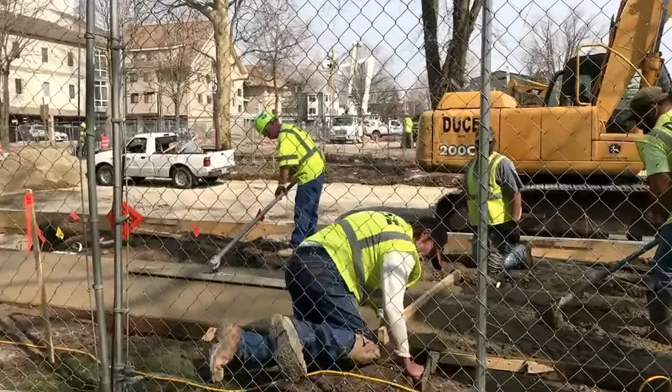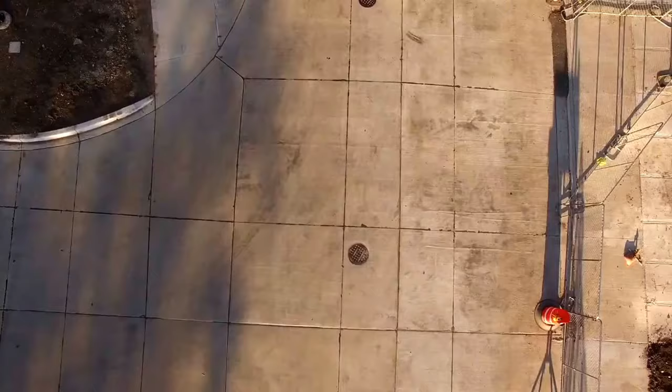Measuring productivity of construction projects has never been an easy task. Yet, at Odebrecht, it is important to track construction labor productivity as it can make the difference between a project being profitable or a project destined to create a loss. As a construction manager, it's our job to keep close tabs on what employees and the workforce are doing on the job site to ensure that work is meeting optimal productivity standards.

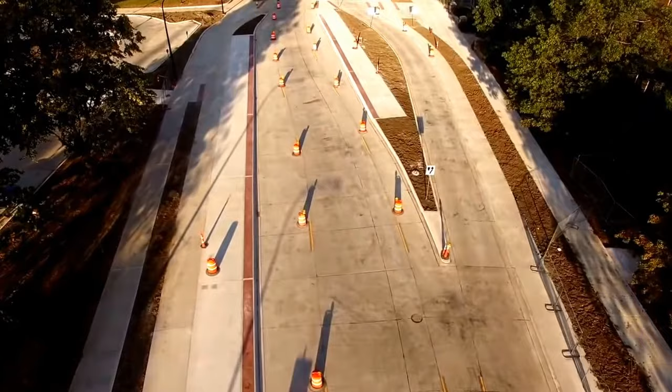This constant assessment takes managers a great deal of time and effort. However, analyzing the data from such observations can help one take stock of the situation and take corrective actions to realize the project charter. To experience this firsthand, we, a team of 7 students emulating the project team of Odebrecht, the large Brazilian construction corporation, decided to study a repetitive construction activity. We chose the installation of a storm sewer as the activity under perusal.

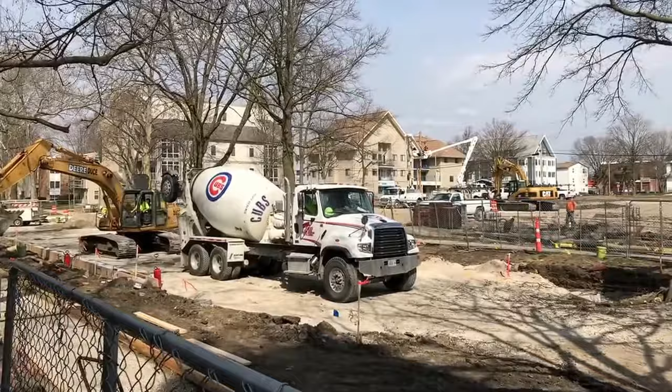The broad strategy was to first understand the existing field conditions and the terms of the contract. Detailed work process analysis of current practices was undertaken via crew balance charts, process charts, and flow diagrams. A productivity improvement program was undertaken to implement 3 alternate work processes, each with a different focus, varying from reducing time to reducing the size of the work crew or proposing a new work methodology.

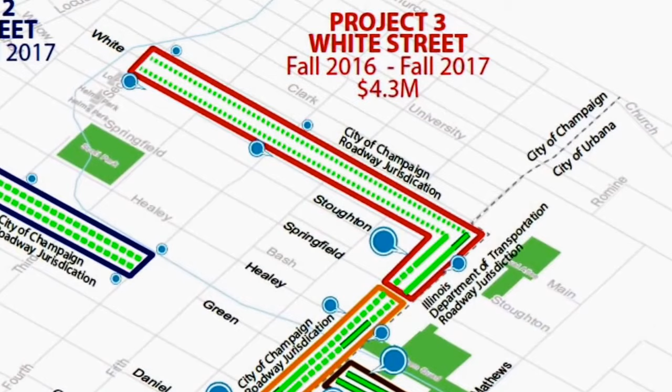The project site chosen for the study was the third phase of MCORE. This involves construction along White Street from 2nd Street to Wright Street and on Wright Street from White through Springfield Avenue. MCORE stands for the Multimodal Corridor Enhancement Project, undertaken to improve mobility in the core of our community through the Tiger Federal Grant Program.

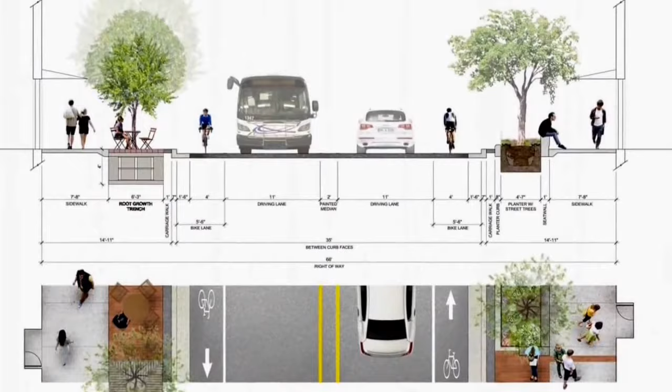The aim of this work is to have a multi-modal complete street corridor to accommodate all modes of travel such as bus, pedestrian, bike, and vehicle. The team is improving not only the superstructure but also the infrastructure. To do that, there are 4 basic steps on this project that they've been following.

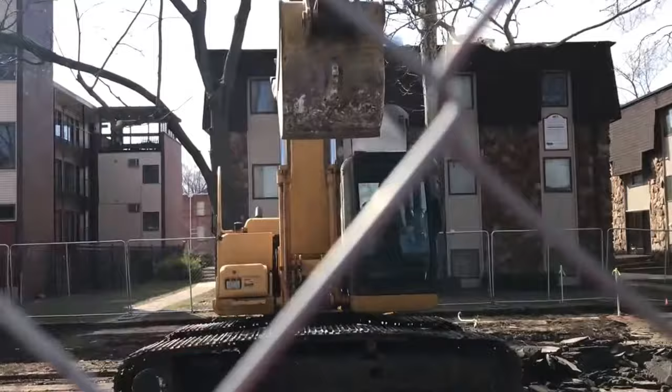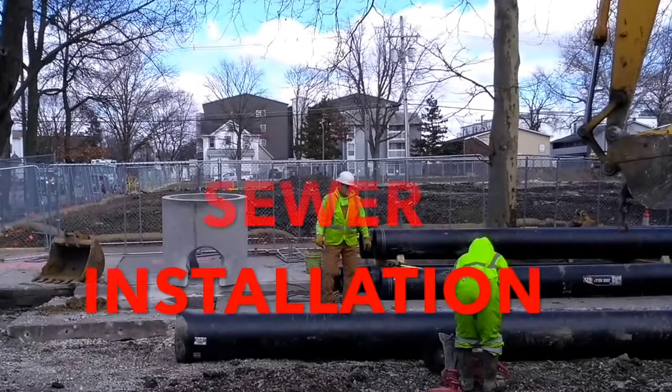Step 2. Storm sewer installation. The process starts with the replacement of the storm sewers and pipes. Then the team is removing the old pipe system to put the new ones. New pipes and storm sewers are being moved and placed with a hydraulic excavator.

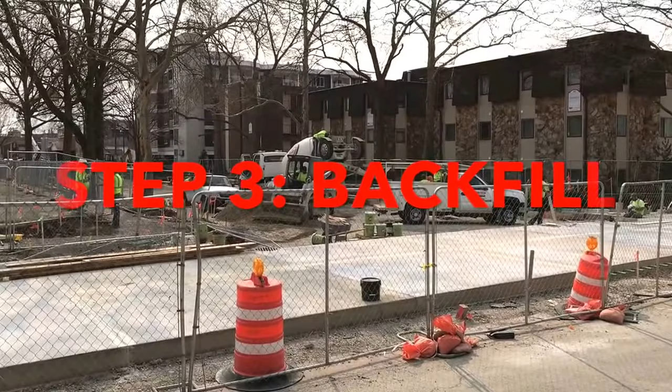Step 3. Backfill. Once they're done with replacing the pipes, backfilling and grading are the last things that they should do before the road construction. As you can see here, the crew is using a truck loader to fill the pavement area.

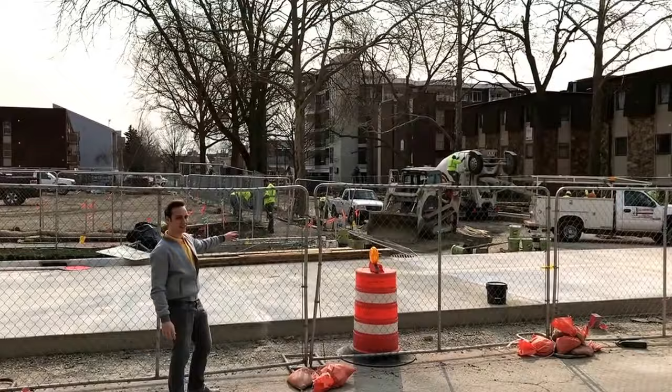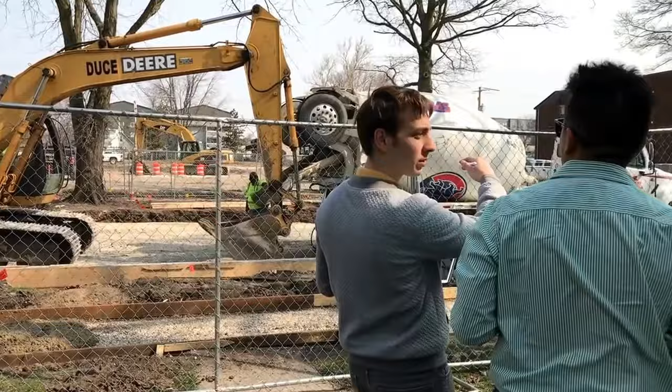Step 4. Pavement construction. This is the last step of a challenging and important work. Pavement, sidewalk, curb, and gutter are just some of the components of the road that affect the lifetime of the project. As you can see here, with a Deere 200C, they are pouring the concrete for the sidewalk. The road construction step is very important to have a good-looking and effective multi-modal complete street corridor.

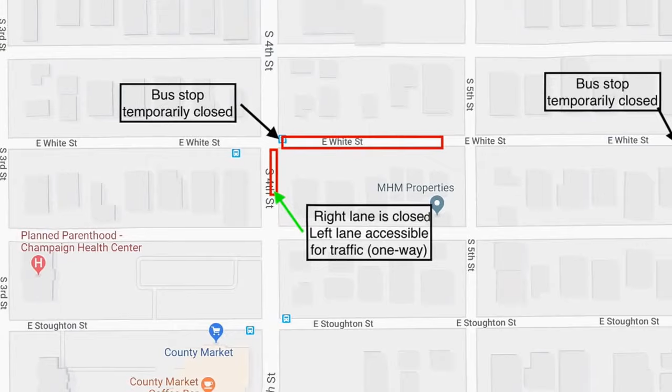Regarding the site conditions, as you can see, East White Street is completely closed on the section between 4th and 5th Street. Excavation is ongoing on this part. Since this section is closed, traffic is extremely affected. Multiple buses for CUMTD were rerouted. These buses now serve temporary stops on East Stoughton Street.

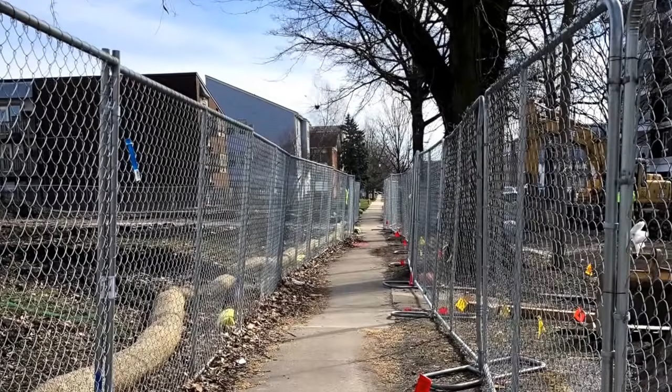The right lane of 4th Street between East White Street and East Stoughton Street is closed. Consequently, the traffic is also rerouted, but the left lane from north to south is open to traffic. However, the pedestrian walkway is still open on the north side of East White Street. Fences are placed to protect and prevent pedestrians from going into the job site.

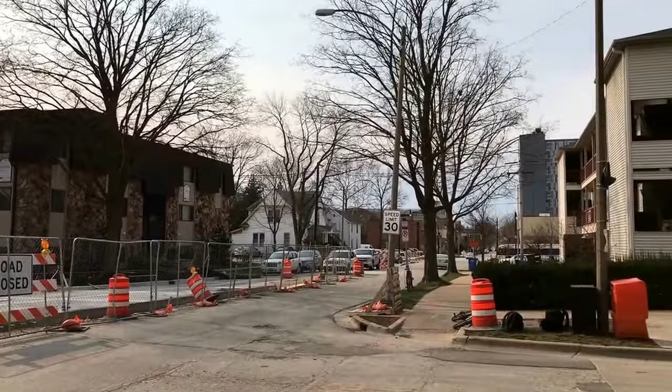As you can see, multiple cones are placed along the fences, so they are visible to drivers and pedestrians during nighttime. 2 big signs indicate that the 2 lanes are closed on East White Street. A smaller sign indicates that the sidewalk is closed too and asks pedestrians to use the walkway on the opposite side.

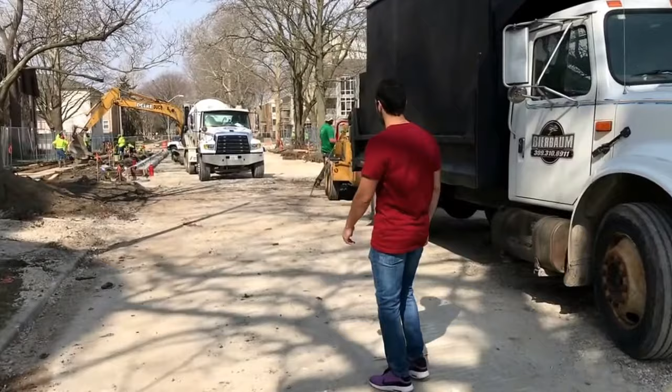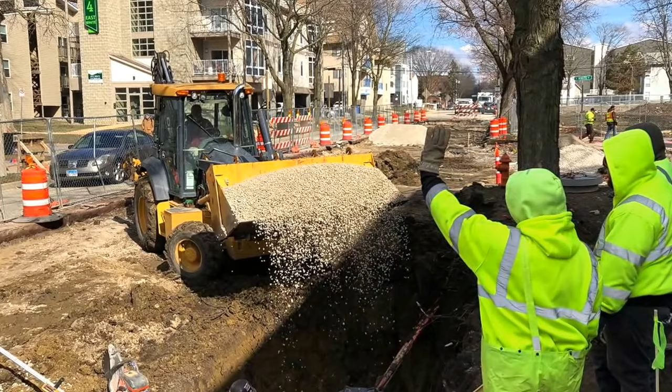Odebrecht's main interest is to ensure the safety of its workers on the job site. For this purpose, the company appoints a safety manager. His main role is to ensure that all safety rules are implemented on the construction site. Some of the tasks taken by the safety manager include the permission to visit the job site, the proper attire of visitors, raising awareness on safety, and keeping a safe distance.

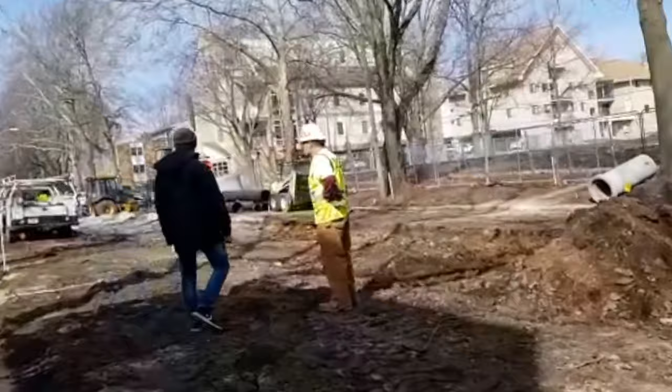Regarding the safety of the team working on the excavation and placing of tubes, the site and workers were found to meet all safety requirements imposed by OSHA. OSHA prescribes construction personal protective equipment for construction workers, including safety glasses, face shields, hard hats, and so on.

Improving job site productivity means possessing a clear understanding of exactly what is going on. That means gathering data. Two main avenues for gathering data are asking and observing. Asking questions can be accomplished through interviews or questionnaires. Observation includes analytic worksite documentation.

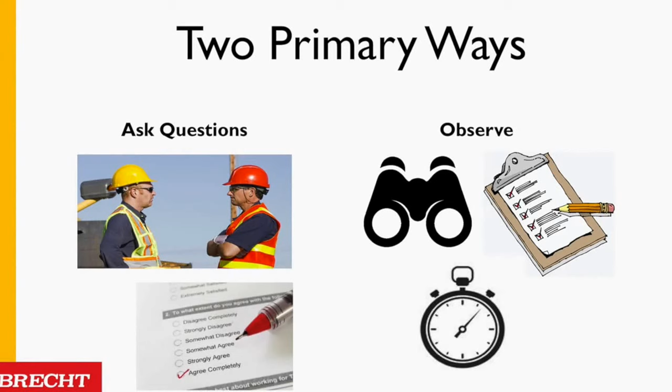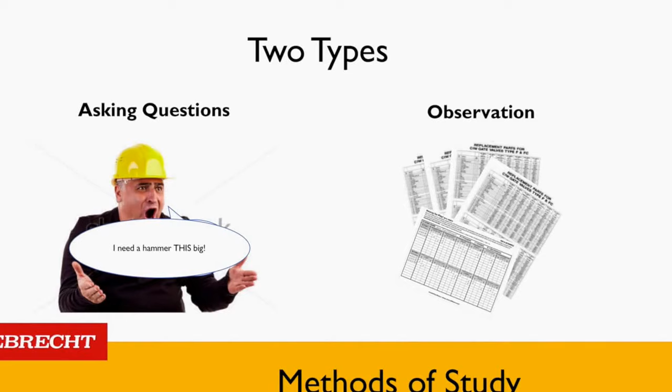Laborers and foremen have the ability to provide some of the very best feedback and can reveal things missed by numerical indices. But while answers to management's queries have very clear significance, the feedback can be tough to measure or model. A complaint about tool availability, for instance, doesn't indicate how pervasive this problem is. A factual accounting of worksite activities, however, would provide exactly that level of analytic power. So how can this be done?

Through activity sampling. Activity sampling may include field ratings, productivity ratings, and the 5-minute rating. While all these provide some indication of how productive a workforce is, they do so with varying degrees of sophistication and statistical power. This means a couple of things. First, it means that there should be enough observations to rule out noise as an influence. Secondly, to be valid, observations must be done randomly.

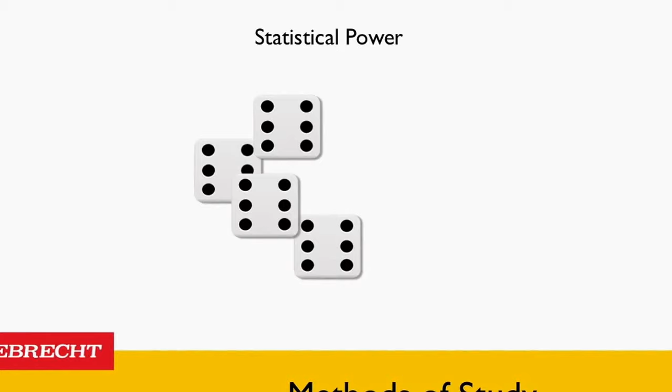If every moment doesn't have an equal likelihood of being observed, then the data gathered may be corrupted by some form of sampling bias. Can a die that rolls 6 four times in a row be trusted? Probably. Well, what if it comes up 6 400 times in a row? Not a chance. Get it? More observations means more statistical power.

And what of random sampling? Why is that important? Imagine a superintendent who shows up only at noon to see if his worksite is busy. Chances are his non-random observations will give him a poor representation of the situation. Random sampling provides data from which statistical inferences may be made. Once data is acquired and analyzed, it must be interpreted and presented if decisions are to be made.

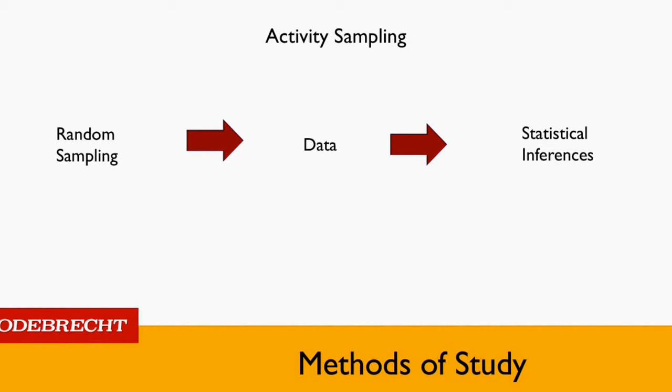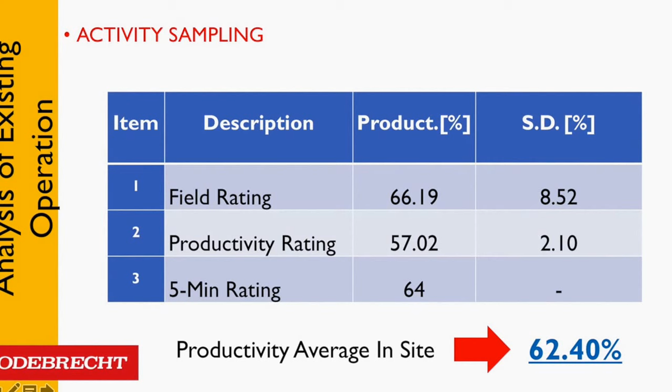A field rating counts the number of people engaged in meaningful work against the total number of workers observed, providing a percentage of productivity. Similarly, a productivity rating provides a percentage of engaged workers, but further discerns between effective work and contributory work. A 5-minute rating provides a non-statistical, quick and dirty look at the situation.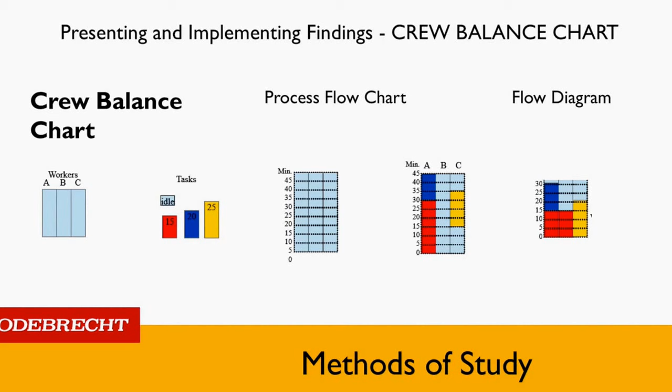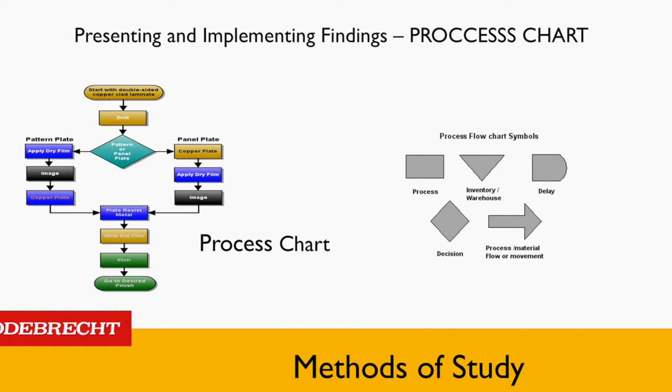Presentation and implementation may be performed with one of the following techniques. A crew balance chart allows task allocation to be represented graphically in chronological progression. It can be used to easily identify inefficiencies. A process chart is a sequential list of steps, coded by symbols dependent on the step's nature, and a flow diagram is essentially a line sketch depicting the movement of people, materials, and equipment. This encapsulates the process of data acquisition, analysis, and presentation.

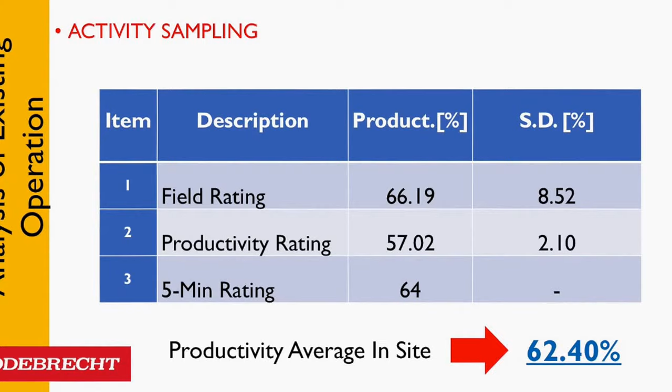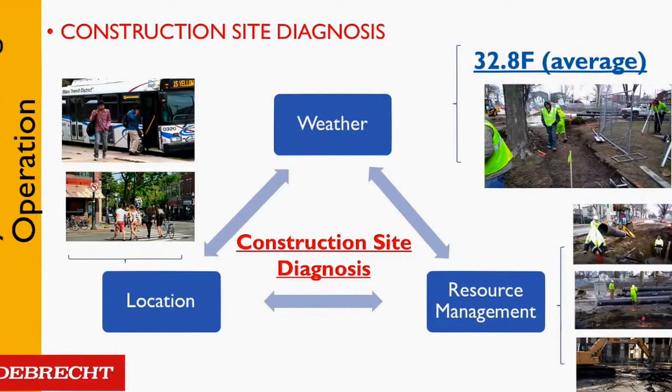Odebrecht conducted the analysis of the existing operation at the construction site. Developing this analysis, Odebrecht performed observation sampling at the construction activity. As a result, we obtained a total of 62.4% of productivity performance on site. We determined a total of 4 factors that affect the behavior of our selected site activity, which is storm sewer installation. These factors are weather, location, personnel, and equipment management.

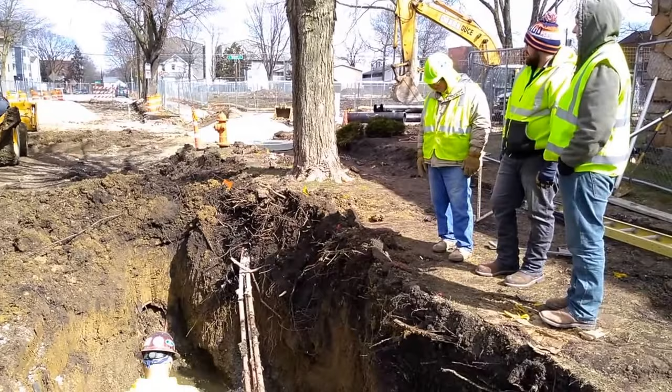In terms of personnel and equipment management, a total of 11 workers and 3 types of equipment were found on the construction site. After observing work routines, there is a clear cycle composed by 6 of these workers that facilitates the analysis of the construction activity. These workers are distributed equally into different labors. For instance, there are 2 operators, one for the backhoe and one for the excavator.

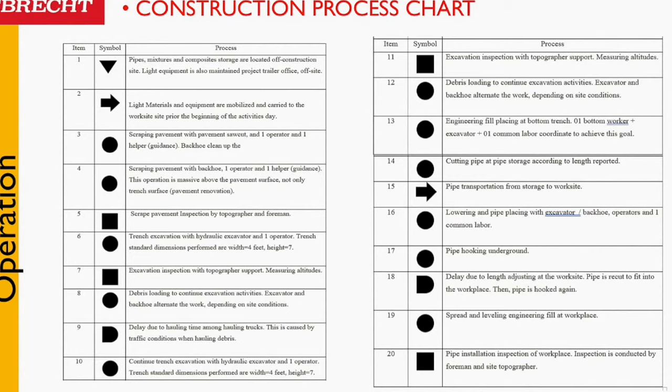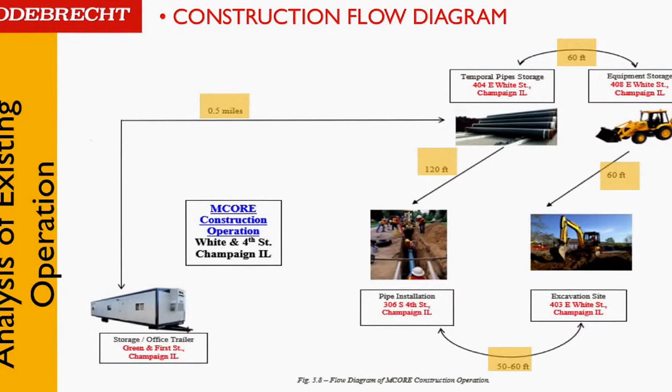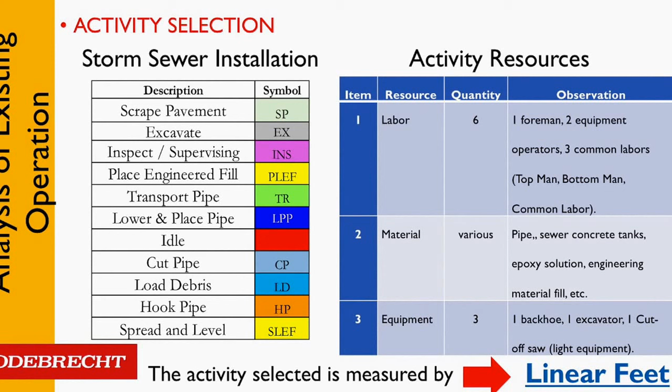In order to understand the natural flow process of the activity, Odebrecht performed the flow diagram of the construction operation. These approaches facilitate the definitions of the activities included in the typical crew cycle balance to perform productivity improvement assessment. As a result of all the evaluations performed, Odebrecht found a typical crew cycle balance of 4920 seconds, which means an equivalent of 82 minutes or 1.36 hours. This amount of time, translated into number of cycles per day, is equivalent to 5.85 cycles.

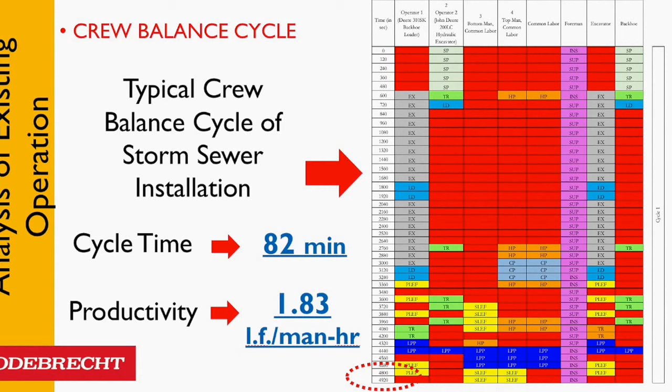Considering that the unit of measure of our activity is linear feet, and under a typical cycle of 15 linear feet installed per cycle, the productivity rate found at the construction site is equivalent to 1.83 linear feet per man-hour. This productivity entails a cycle cost of $700.63 per cycle and a total unit cost of $279.97 per linear foot.

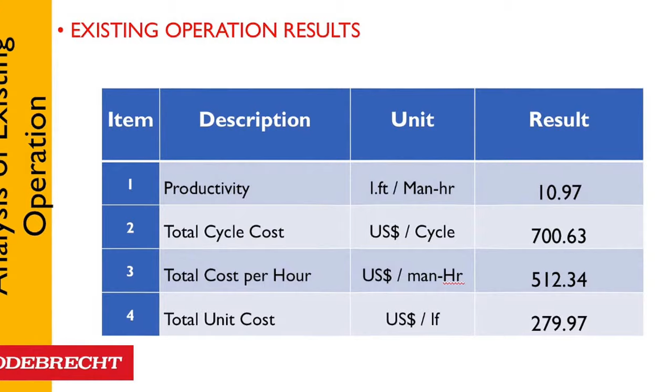The typical crew balance chart of this construction site was analyzed. Based on this analysis, 3 different improvement plans were proposed to enhance productivity on site and decrease total idle time of resources, as well as attempting to decrease the total cost. 2 heavy equipment, backhoe loader and